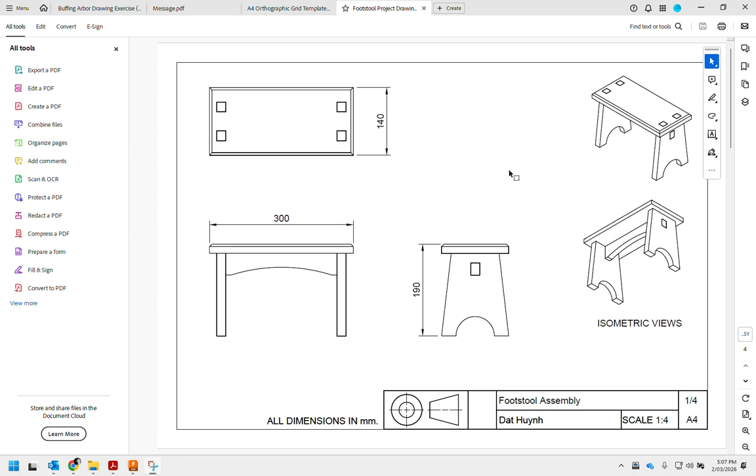Okay, so we're going to start with the rail. The rail piece looks like this. So I'm going to take these dimensions and model it again from scratch. You should have a technical drawing, probably a hand-drawn version of this, that you can take into CAD. So I'm going to start with Fusion. I've already made one, so I'm going to make a demo file just to show you how to do this.

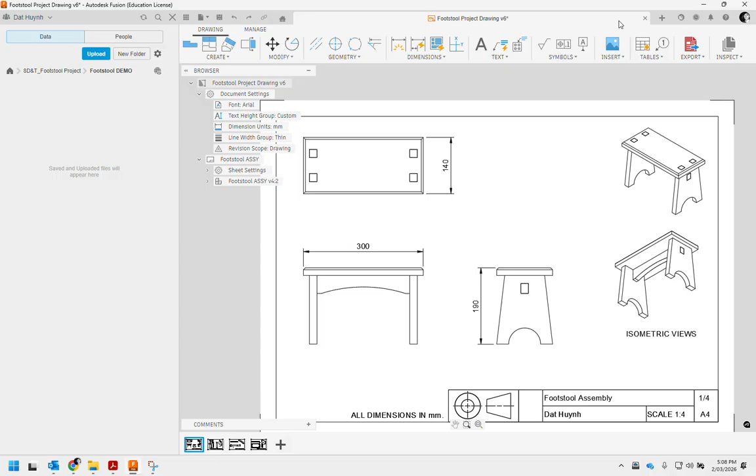So in your project folder, make a separate folder, double click into that, and then we're going to make a new part. This drawing is already open, so I'm going to close this for a second. Don't save that. We're going to make a new part. So new. We're going to start with the part design.

So just to understand, the way we're going to model this is called bottom-up assembly. We're going to make each of the parts in different part files, then we'll make an assembly file, chuck all the parts in the assembly, and then we can put mates and constraints on them so it mimics physics, and you can actually see it come together as an assembly. As you can see, there's 3 blocks here. It'll assemble the parts together.

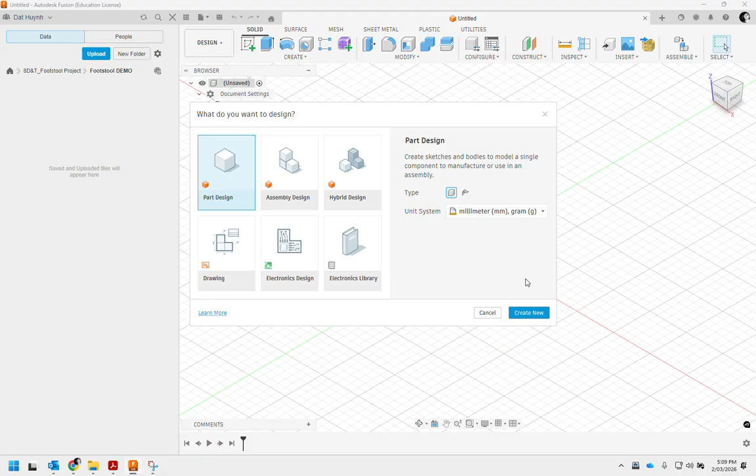So I'm going to create a new part. Make sure your default's in millimeters, and the type is solid. Make sure it's highlighted. Create new, and we're going to start modeling it. So we're going to start with the first sketch. We go to sketch, choose a plane. I'm going to choose a front plane here, and I'm going to draw a rectangle. So my rectangle is going to look like this. Sketch on this plane first. Okay, and I'm going to draw a rectangle.

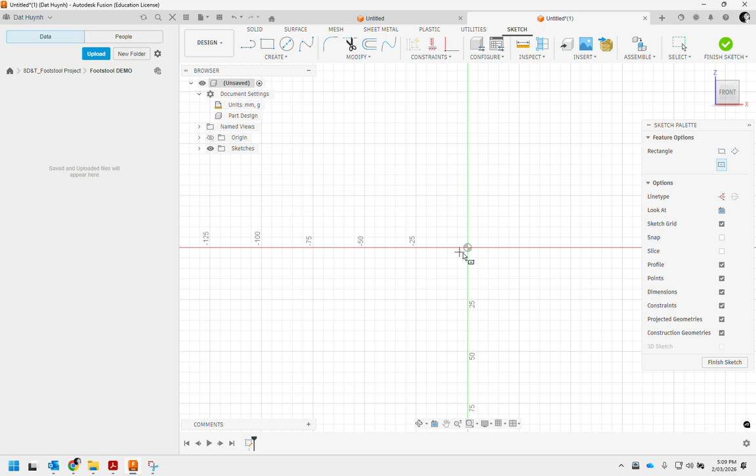Because it's symmetric, I'm purposely going to choose a center rectangle, so that I can capture the datum right in the middle. That way I can make the vertical and the horizontal planes exactly in the middle, and I'll tell you in a bit why that's handy. I've drawn the rectangle. I can now go and dimension it.

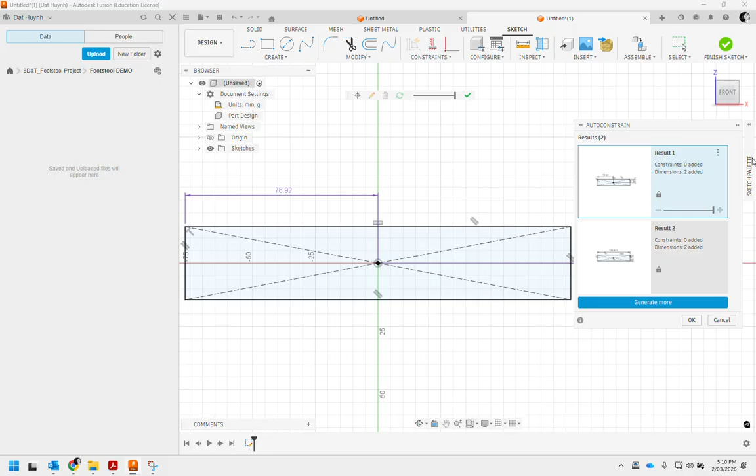So dimensioning's in here. Oops, not constraints. We don't want to do that. Don't do auto. Auto's bad. I would actually manually dimension it. Sketch dimension, shortcut is D. So I want to be using D from now on to dimension. Looking at our drawing, dimension the length of this to be 270, and the width is 45.

Notice the lines turn black. That's what we want. Black lines are locked in. It means they are constrained. They have been defined. What that means is if I press escape, so I'm out of the dimension tool, I can no longer move and wiggle these lines. It's been fully defined as 270 by 45. And that's what we want. We want to make sure that when we're done with sketches, all our sketches are black lines. Black lines are constrained sketches.

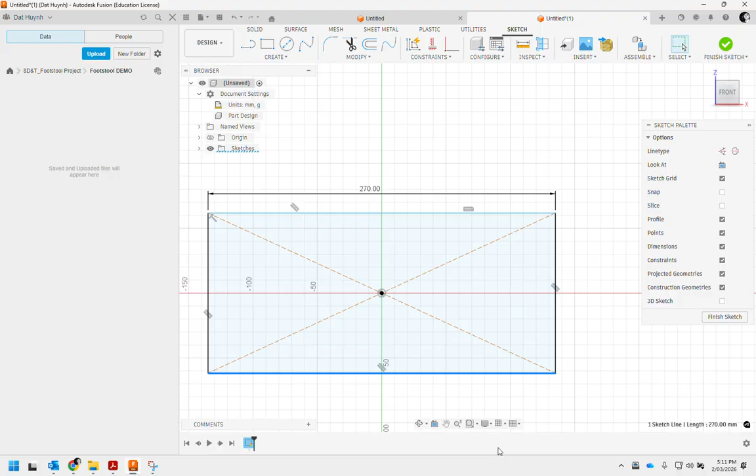Reason being is, let's say I delete this 45. If I delete it, you notice these 2 lines turn blue. If you left it like this, yes, it's still 45. But let's say someone else came into your model, or you did this accidentally yourself. You click on the line and you accidentally move it. It's not constrained in the vertical axis, which means that's no longer 45. And so this will disrupt all the other parts that it would be mated to when you make your assembly. So it's very good practice to define your sketches at every instance that you can.

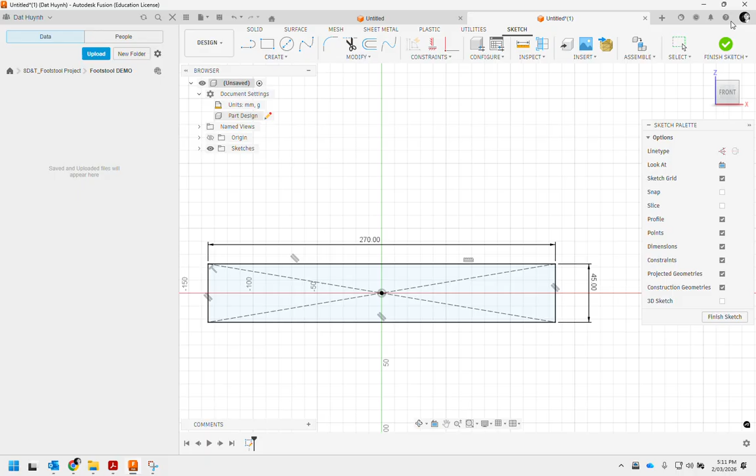So once again, I put the dimension on that line, type in 45, enter. Now it's constrained. Finish that sketch. I'm now going to extrude it, turn it into a 3D shape. It picks up the first closed shape. If you hold down Shift and middle mouse button, you can get a 3D view, and you can click on this arrow and move it to simulate how thick it's going to be. You can override it in this box that opens up. The distance we're going to extrude it is the thickness of the material, which is 19 mil, and we click OK.

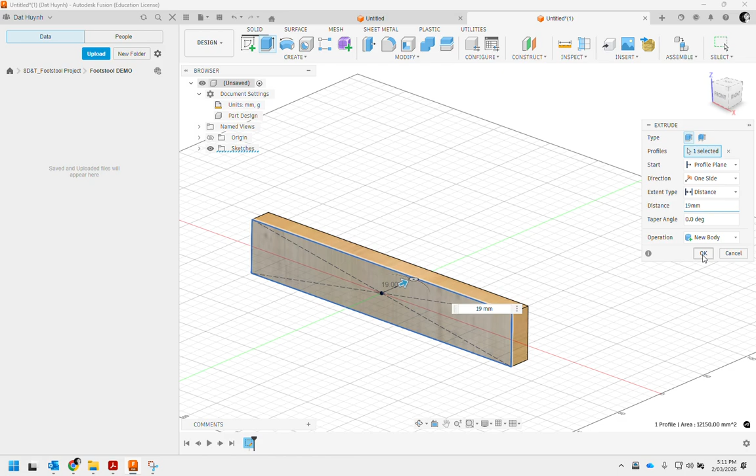That's our block of wood. Ignore the grain direction for now. My default setting for material is pine, but the grain direction is not correct as to how the wood's going to come out. I'm going to show you how to do that in a separate video.

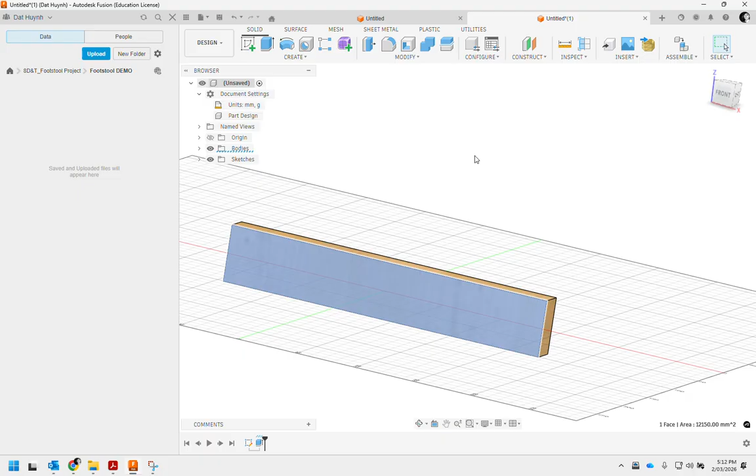So the next thing we're going to do is now cut out the joints. Okay, we're going to cut out these joints on the side. So once you get a block of wood, what do you do? You're going to sketch on that surface, edit, create sketch, and you're going to draw the joint that you need to cut out. In this case, we're making a shouldered mortise and tenon, and I'm only going to do one side. I'll tell you why I'm not going to do the other side for now.

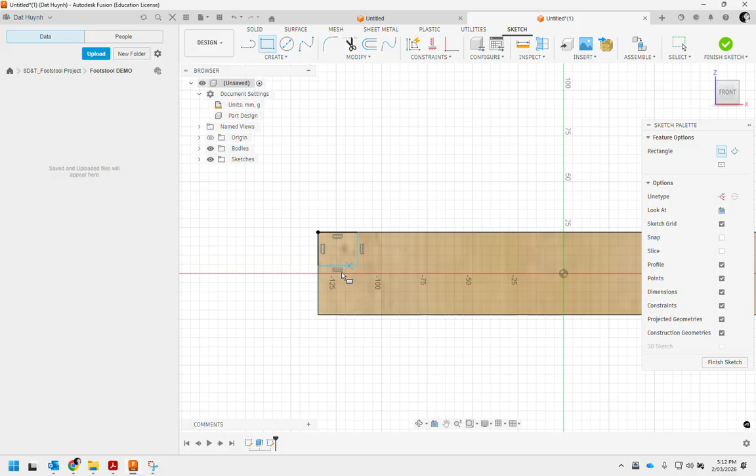Notice that I clicked on that corner. It knows that's a corner that's coincident with the edge. That's why it's black, but these lines aren't defined. So once I'm finished with my rectangle tool, I press OK. You can see here that I can click and drag this up and down, and this one left and right, because it's not defined. So we need to define it with dimensions. Shortcut is D. Hit D.

Select that line. Work out how much that's got to be. Okay, in this case, it's 25. You know what? I've dimensioned it from the bottom line, so I'm going to dimension it to this bottom line. So when you click dimension, you can do it from a point to a point, to a line, or just a line. I want this dimension here because I like to use the base as the datum.

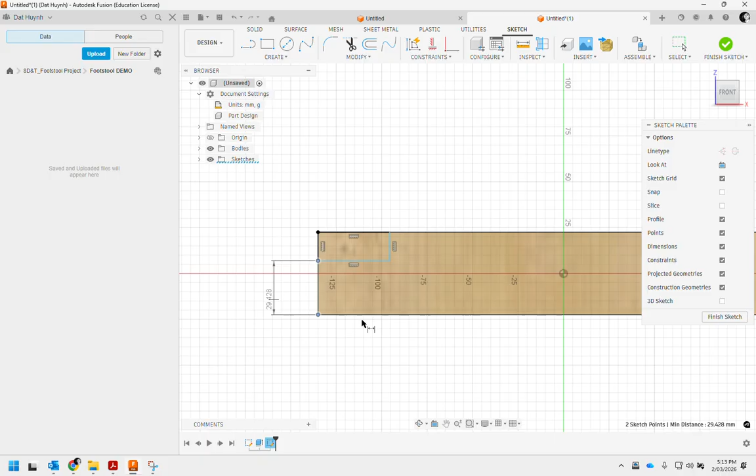So my datum to the start of that edge is 25, and the depth of the cut here to here is 19, same thickness, because that's where it's going to go into the leg piece. Okay, so that's all rectangle, that's all black lines, that's exactly what I'm after.

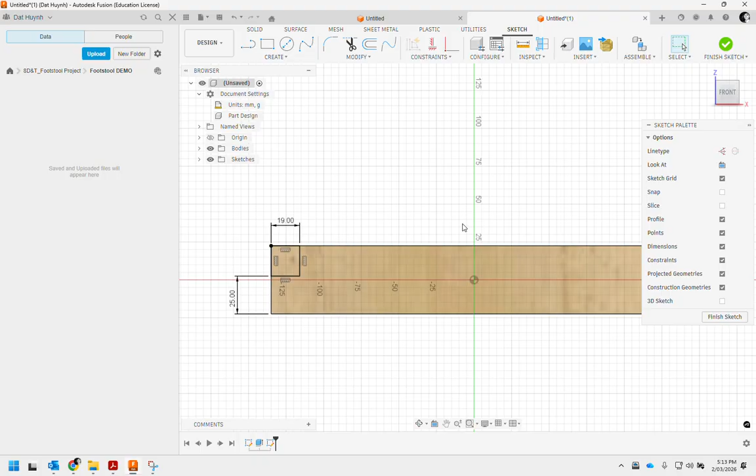Now, to save yourself time not having to do it on the other side, we know it's mirror imaged. So I'm just going to draw a new line in the middle here. I'm going to snap to this point, I'm going to snap to this point. Click OK. Convert this line to a center line, which is right here. You can always convert it back to an outline by clicking on that again. I want it to be a center line, because then I can use that center plane to mirror these features, so I don't have to do the other side.

So I can go to this tool called Mirror, which is in here, Create Mirror. I can select the things I want to mirror. So this one, this one, this one, and this one. You can also click and drag, by the way. That also works. Choose the mirror plane, and it automatically knows that's the first mirror plane that we came up with. Just select this. There you go. And it previews what it's going to look like. Hit OK, and it creates that other side.

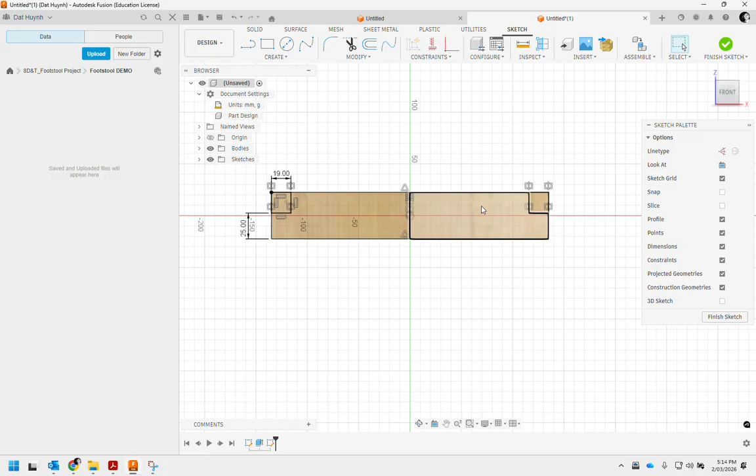Okay. I finished the sketch, and I made 2 rectangles. Oh, the great thing about this mirror, I haven't finished it, I didn't click that yet. The greatest thing about this is if I change this number, for example, I make that 25, the other side updates too. So this is a smart, thinking harder, working smarter way of dimensioning. It allows you to do the minimum amount of dimensioning required, and it gets you the maximum output with the least amount of energy. So that's done.

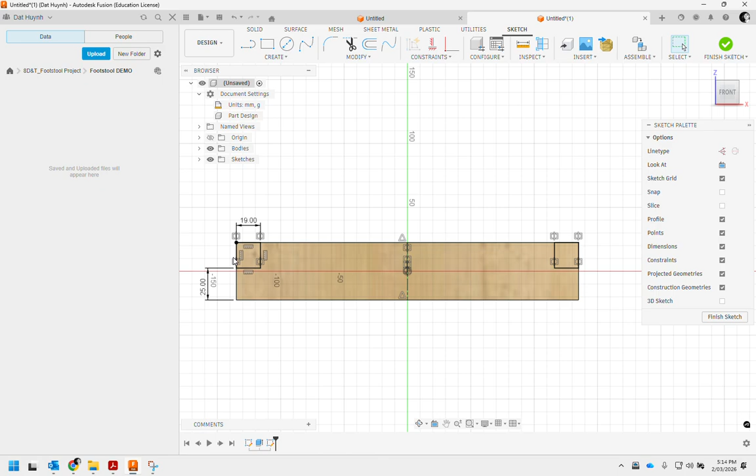19, 25. Finish the sketch. And now we're going to extrude again, but in this case, we're going to select this surface and this surface. But instead of join, we're going to extrude cut. And the way we do that is we can change the direction, one-sided, to plane distance all. We're going to actually extrude the whole thing, and I'm going to flip the direction.

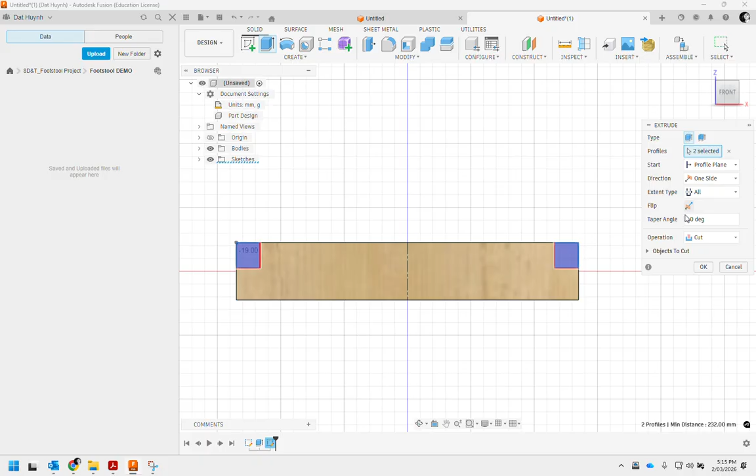If you can't see what's going on, you can go to this top cube here, have a look. You can see that the extrusion direction is that way. You can make more material, which is not what we're after. So we just flip the direction. So we don't want a distance, we go to all, and we want to flip the direction here.

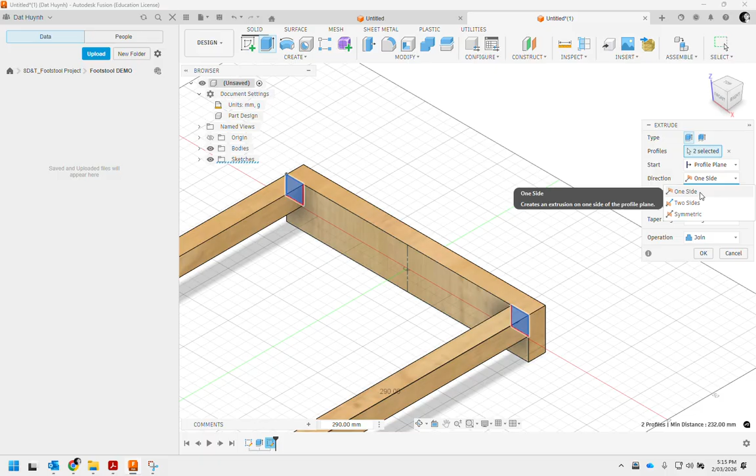And you can see it's removed the material. That's exactly what we're after. So 'All' means, the profile means we selected 2 profiles. The start plane was this one. The direction is this one. Okay, you can override it by clicking and dragging as well, like this, as you can see. But it stuffs up. You just do one side, and then, once again, flip it.

The taper degree, ignore that. Operations: cut. For this to exist, this extrude has to be a cut, okay? Because it can't extrude into existing material. It's got to remove that material. Click OK, and it's made the joint, okay?

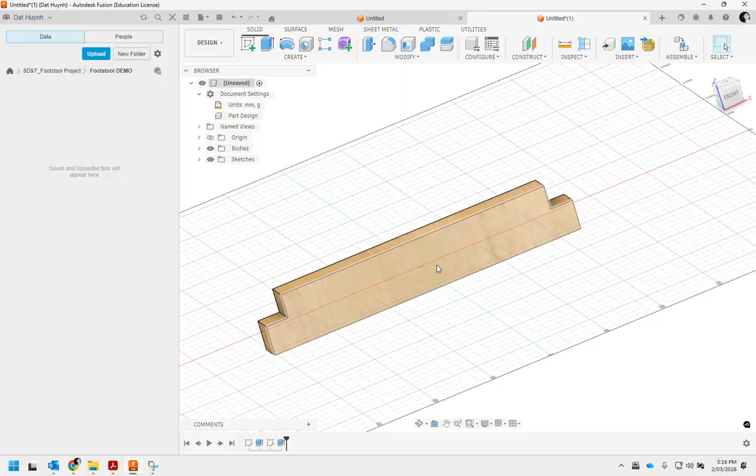The last thing we can do, and this is a bonus task, you don't have to because this is already essentially complete, is you can create a decoration in this guy, right? So you can choose to cut away this bottom part to a certain extent. So we can do another sketch plane on this, create sketch on this surface, and let's draw a new centerline in, okay? Because the other one was part of the other sketch. Right click OK, make this a line.

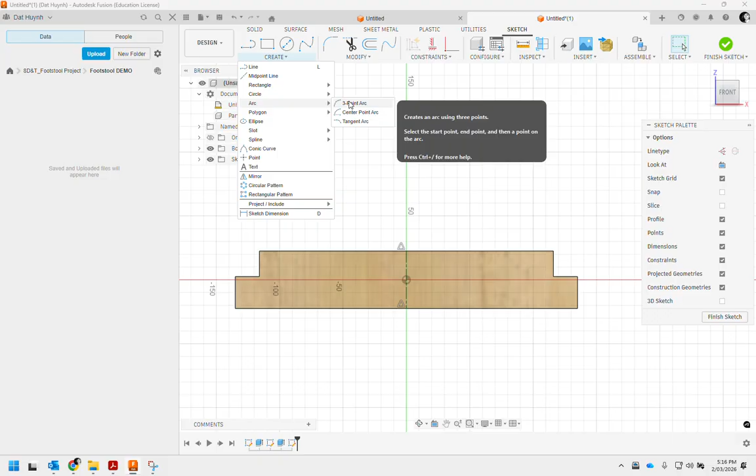And then I can do a 3-point curve, create arc, 3-point arc, and go here, here, and here. Oh, actually it's not 3-point arc, my bad. I'm going to delete that one. I think it's a, no, it is a 3-point arc, isn't it? Okay, 3-point arc means you have to click on one side, the other side, and then the middle point. So the middle point will click somewhere on this line.

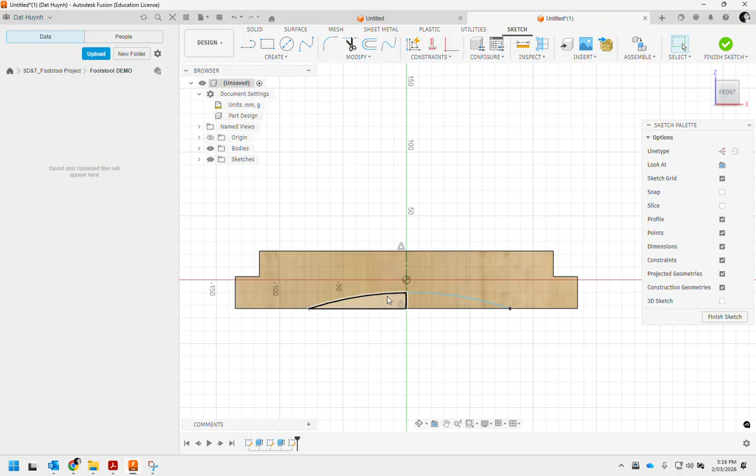And what I can do is I can make this distance the same as this distance so that they become symmetrical. See how that's not symmetrical, right? So what I can do is I can set a parameter. I can draw a line here, like this, to here. And I can draw a line from here to here. 2 lines. I can make this line, hold shift, hold this line too, go to constraints, make them equal. Okay, so that means I can make those lines equal.

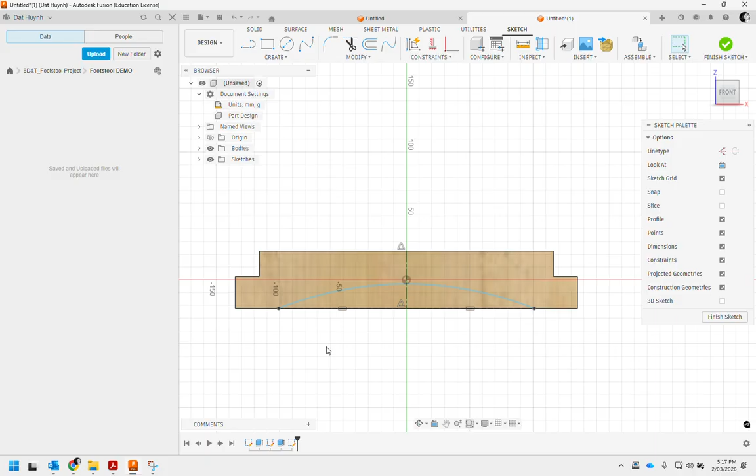Okay, now these lines I don't really need to use. You can keep them as outlines if you want, but good practice is to make them construction lines because they're used to construct. Now that they're equal, I can move this point and it moves the other point because those lines are equal, and I can adjust this arc. So you notice it's still blue. This line's black, but the point, because it knows it's got to be collinear with this line, but it doesn't know how long it's got to be. So we can define that. So we can go to dimension, D for dimension.

I want this point to be a certain distance from this point, so it doesn't make this part too thin. It also can't impede on this area because this whole area here is going to be inside a joint. This is the mortise and tenon. So I want this one to be, let's make it 40.

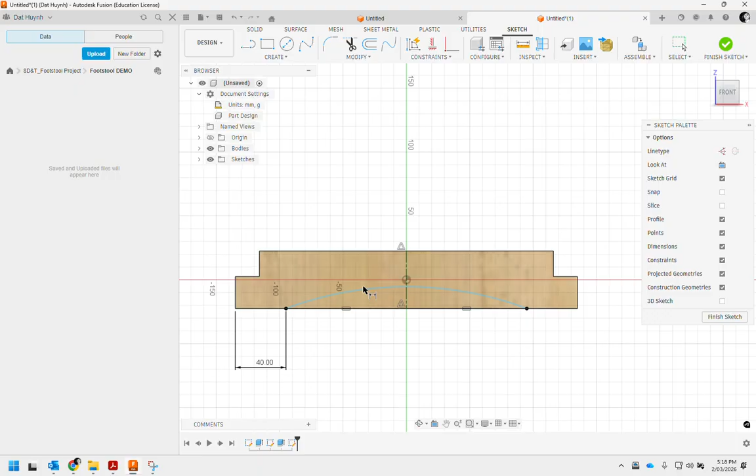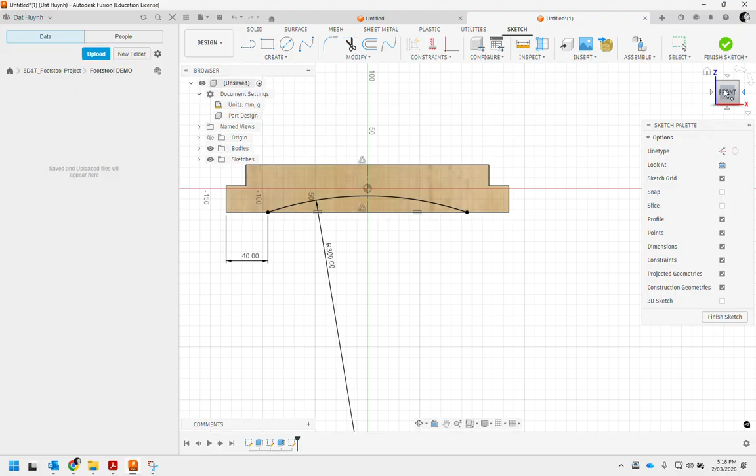Okay, and I can make this arc defined by its radius. Click in there and use a whole nice round number, maybe 260. 260 looks good. Yeah, that's fine. Or if you want to, you can just make that 300. Oh, 300. Okay. Click, right click, OK. All done. Finish the sketch. All right. And then we can extrude cut this guy and this guy.

Now, once again, I'll show you another method of doing it. I can move this arrow back this way and it automatically tends to cut. See, when it was like this, it's joined, it's going to make more material. We don't want that. We want to cut away material. So move it back this way. It says cut, but instead of distance, I can go to all. So it's going to cut through everything.

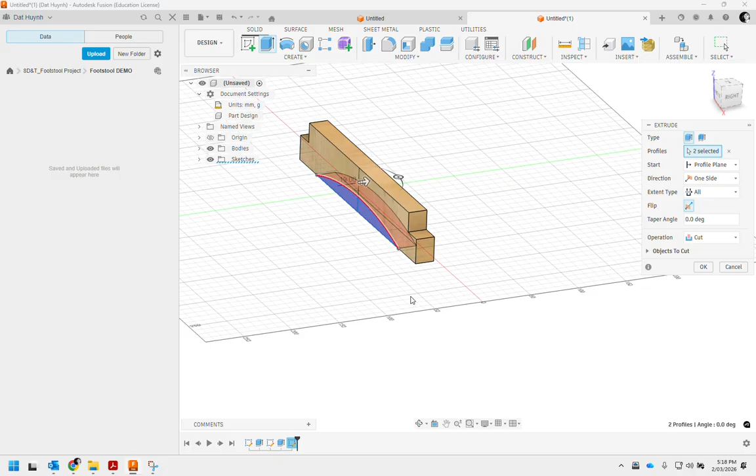So no matter how thick this gets, it will always cut through the entire thing, which is a much better way of defining this action, right? This feature. Click OK, and there you have it. Our side rail is done. Make sure you save it.

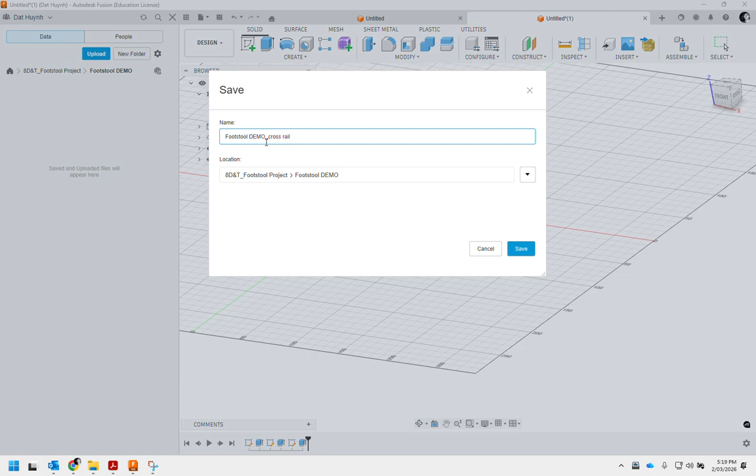So when you save it, I'm going to save it to this folder. The name of this one is my Footstool demo underscore. This is how I'm doing it anyway. cross rail. Okay. Save. And that concludes this first one. I will cover the texture direction in another video.